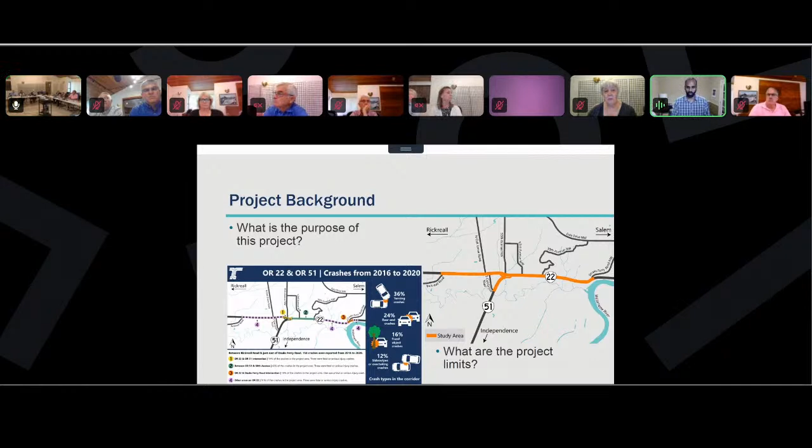Where we are in the process right now, we're refining our interchange and supporting access road design. If we'd given this presentation in April like we originally intended, we probably would have presented only a little bit of information on the access road. We've done a lot more work on this, so it's a more complete, more exciting presentation, as your mayor alluded to.

Right now we're also completing environmental research, and something to stipulate about this project—it's something I always have to caveat because I feel like we're going around this long path to development. We're only funded for design at this stage.

Part of the work we're doing, and I think a really important part, is to quantify what our design looks like—how much does it cost, and how can we build it in small chunks. That's the important work we're doing. I understand it's going to be a really expensive project, but some of the previous issues I've identified is that it's always been an aspirational project, something we'd like to do without really going into the legwork of doing what we're doing now. I think doing that now is going to put us in the best position to find that funding and quantify what that is.

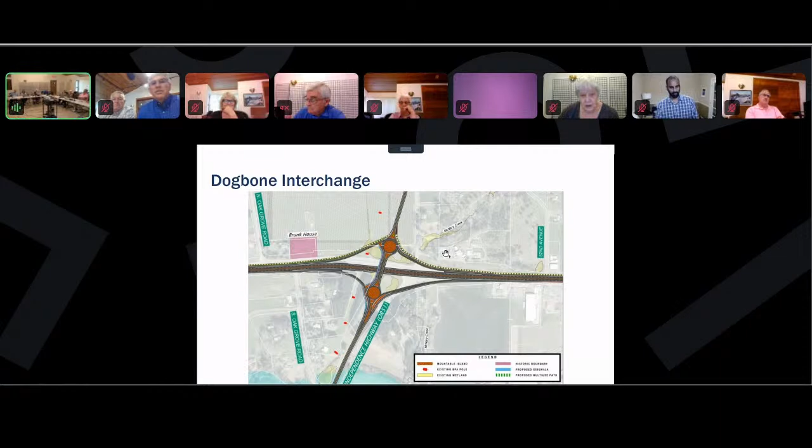This is... Oh, let me ask you just, you said that's a 2-lane loop coming out of that, or does it split into 2 lanes as it approaches the roundabout on the north side? Yeah, can you zoom in a couple clicks, Kumar, on that north side?

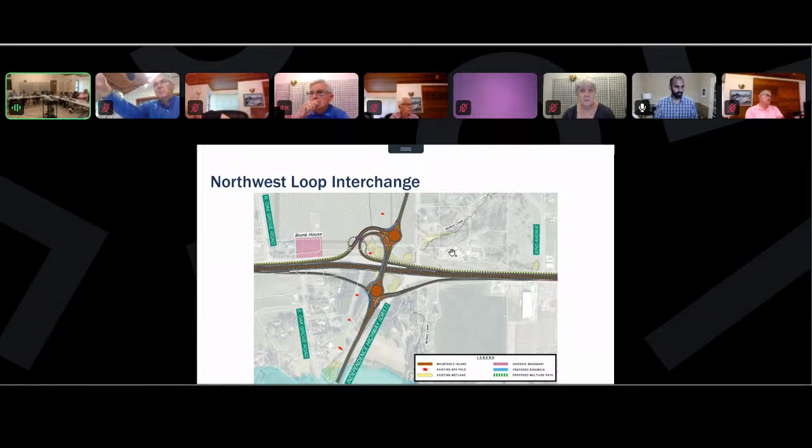What sort of volume are we anticipating that'll come when you get into the access roads from the north? From the north, it's in the ballpark of a 5,000 ADT, 20-year planning horizon. And that includes a pretty significant contribution of traffic coming from the Doaks Ferry direction.

For the length of the project, we'll install some median barrier there, and traffic that's largely on the highway today, some of that will be on the access road itself. The entrance at Doaks Ferry will just be an exit leaving the highway and not entering the highway there. So a lot of that West Salem traffic that comes down and uses that Doaks Ferry connection to the highway will now be using the interchange, in addition to a lot of the business or residential traffic along there. Yeah, thank you.

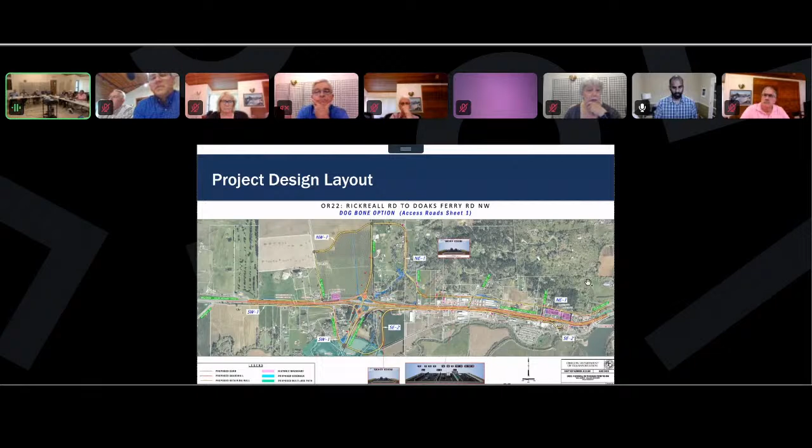Okay, we can come back to answer questions on the interchanges if you want, but now I'll segue to the access roads. The access roads are very important to the function of the interchange because they help restore that left turn function that folks will lose by putting a concrete barrier median in place.

So this is the first option. It's on the north side, furthest away from the highway. The access road from the east goes up 52nd, a short ways by the Pinnacle Theater, up 53rd, and then across on Astor Street. That is largely along existing roads. On the left side there, across from Astor Street, we show a new road that kind of goes along the north edge of the hazelnut field and the south edge of the vineyard there. It connects over to North Oak Grove Road and then proceeds west to serve the cemetery and the golf course.

This is option 2, also on the north side of the interchange. Comes from the east, and right about 52nd, instead of going north, it actually goes south, kind of along the highway and the hillside there, and curves up and then connects to 55th. Then it lines up across the street from a new road that cuts through that hazelnut orchard and then connects to the west to North Oak Grove Road and so forth towards the golf course. It's a little closer to the highway, so this is the option we call the inner option on the north side. The previous one's the outer option, a little bit longer in out-of-direction travel.

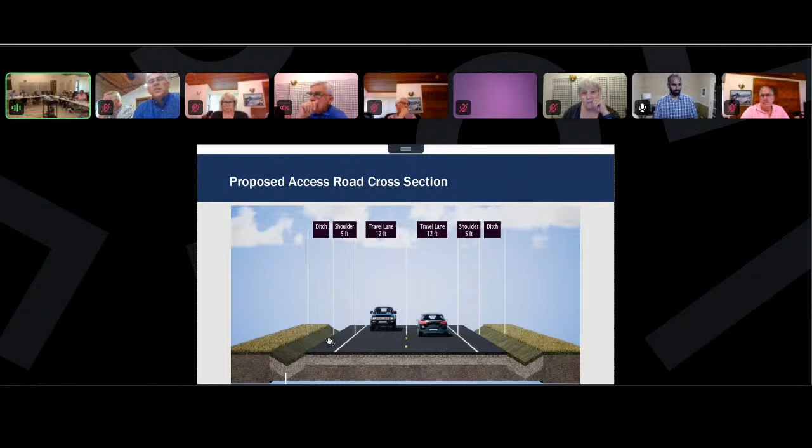And we have to assume that closer means cheaper, not as expensive to go further out? Could be, right, usually shorter is cheaper. There's other factors that come into account, but generally that would be true. Here's a quick cross section of what the road would look like. It's a pretty simple access road that could be ODOT jurisdiction or county jurisdiction. We haven't faced that decision yet, so we're designing it where it could go either way in the future, but it's intended to be a rural road on that north side.

Now, there was a point in time where that road running parallel on the north side of 22 was crossing some unstable land, and there was consideration of that seismic or whatever the problem was. This seems to be running right through the middle of where that was. Has that been resolved? It has not been resolved, and it's probably still unstable. But what we've done in probably the last 3 years is some geotech studies that have gone on.

There's a lot more known about those landslide issues now. Whereas in 2015, 2016, the project team sort of paused work because it was kind of scary and they didn't know what they were facing. We know more about it now, and we think it's a doable project. That doesn't mean it's going to be a cheap project going through a landslide area, but we're planning on it to be feasible. We have more study to do, but we're approaching it with open eyes now, and we think there's a feasible way to do it.

There's probably a lot of background on that. There used to be 3 projects out here. The county advanced one of them for several years, trying to get through that landslide area, and ultimately they paused because of those issues. Now the project you see in front of you today is actually a combination of 3 previous projects into one, so that we could marshal them forward together.

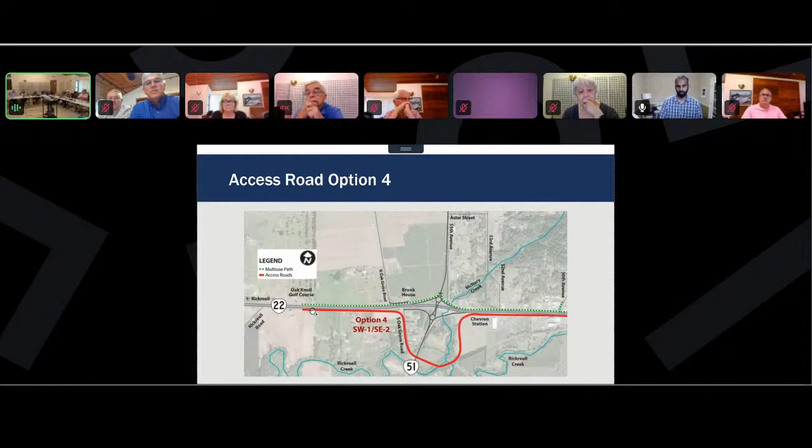This is the second option on the south side. We call it option 4. It's the one that's further away from the highway. Coming from the east, you pass in front of the Chevron there, just like the other one. But then instead of proceeding by the interchange, you cut down through the farmer's field, on the east side of McNary Creek. Come along the old railroad grade, cross Rickreall Creek twice, and then connect up to the existing South Oak Grove Road intersection, right where it's at today, and then it goes to the west up South Oak Grove Road, serving those properties just like the other one.

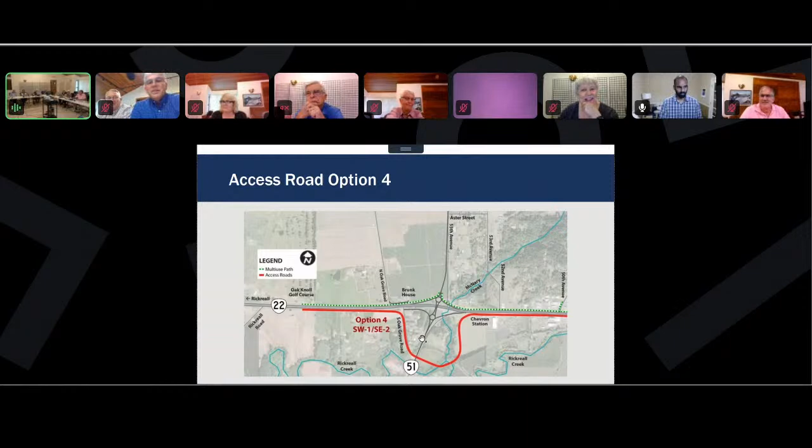So this is connecting up on the left there. I guess you can see this is trying to compare the access roads right next to each other.

So on the left, you have a dog bone interchange with the two inner access road options. The one on the north would be option 2. The one on the south would be option 3.

Compare that to the drawing on the right, which is also the dog bone, but it has the access roads that are further away from the interchange, just so you can see them side by side to see those differences. And on the very south end in the blue color, you can see the floodplain. You can see how the outer option on the south side goes through the floodplain, whereas the inner option on the left kind of skirts right before you get to the floodplain.

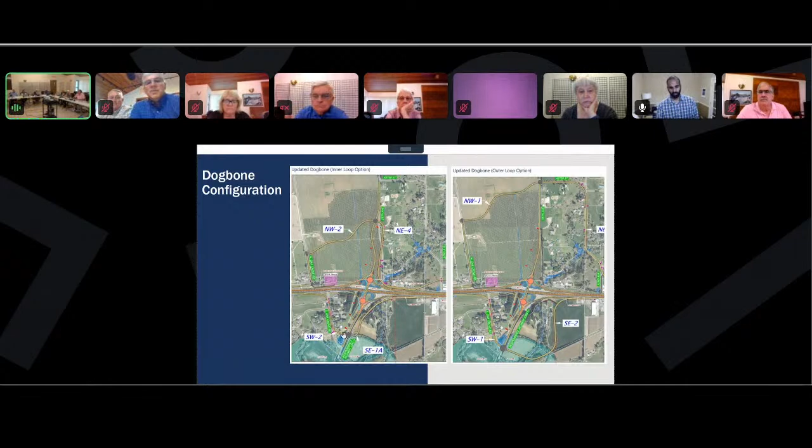This is a similar drawing for the northwest loop, so you can compare designs here. On the left, you've got the northwest loop interchange with the access roads that are furthest away shown first. And then on the right side, you also have the northwest loop, but it just shows the access roads that are closer into the highway, so you can get a sense of the scale of how far apart they are.

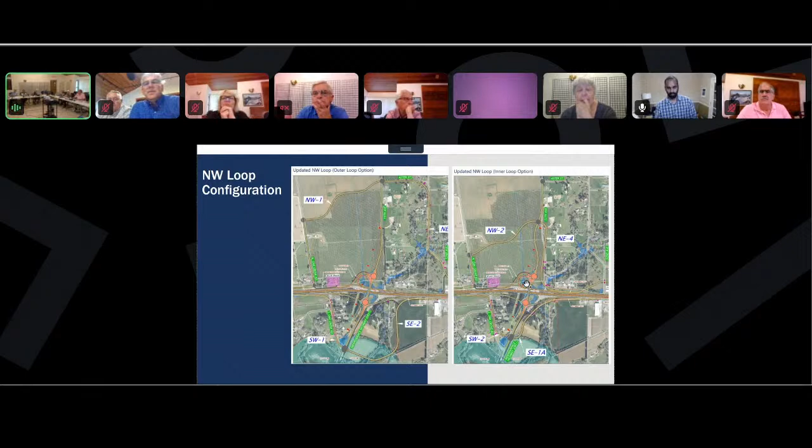We had an amazing public engagement event in early July at the Polk County Fairgrounds. Over 200 people attended in person, which is the biggest open house we were aware of since COVID, which is really exciting to see that much interest from the community.

I don't want to sit here and say everybody was happy-go-lucky about it. It was a very real meeting. Some people were excited, some people had things to say because the impacts are real in some cases. So that was what we were trying to do, just be real with people, authentic and transparent with what was going on, what we had on the table. And to that extent, I think it was a great success.